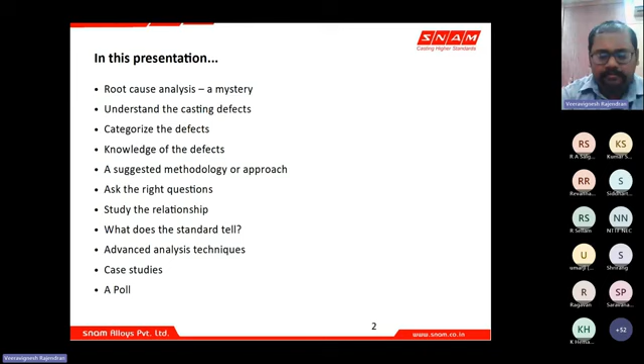Thank you. And we'll be going through some knowledge, like what is the importance of having knowledge of the defects, and a suggested approach or a methodology to handle a defect, and always ask the right questions. So these are the gist of what is about to come today. And root cause analysis, the mystery.

The reason why we call this a mystery is because it is mostly considered to be person perspective. Say, for example, I think that this problem is caused by this root cause. So I start having confirmation bias. The word confirmation bias means I decide that this is the most possible or most favorable thing with my intellectual knowledge, so I try to gather all the information justifying that statement.

So if I do a root cause analysis, what I think as the best cause becomes the major cause. If somebody else does the root cause analysis, what he or she thinks as the major cause becomes the most important cause. But it is actually not that, because the defect is not person sensitive. The casting process involves a lot of science, a lot of mathematics, a lot of chemical reactions, a lot of physical interactions happening during solidification, during pouring, and the entire process. So there is a lot of complexity in the process.

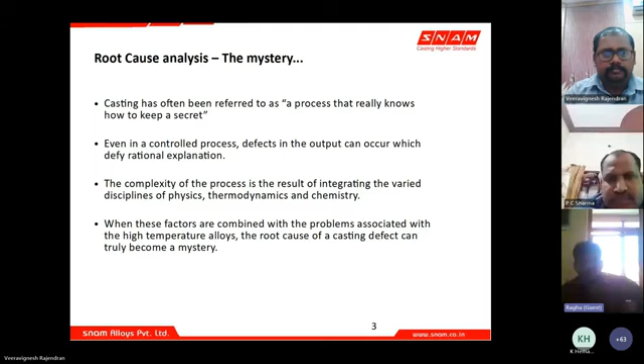That is the reason why arriving at a proper root cause to solve a problem is always difficult for any foundryman. If people have started their career recently as a foundryman, they find it very difficult because of the complexity in the process, and the basic knowledge they have not acquired makes it more difficult for them to understand what the defect is and then take action. You have to understand the defects first. When you want to set something right, you should know what that actually is.

Sir, I'm getting an echo.

Okay, thank you. So casting defects are always very difficult to characterize because, again, it's person sensitive or experiential knowledge sensitive. I say this is sand inclusion. I'm the most experienced person in this organization, I expect everybody else to just listen to me, and everyone should call that sand inclusion only. Even if somebody else has a different thought, I don't encourage them to come up with their difference of opinion, saying, sorry, sir, I differ from you, this might be a different thing.

Or the other way, with the experiential knowledge I've gathered so far, I always categorize whatever I look at as a defect in the same way. For example, anything looking dull, I can call it a short pour or a cold metal, a cold lap. So I try to characterize the way I know.

But the problem is most of the defects are not just due to one cause. It is not just one cause causing one defect. One cause might be causing multiple defects. There can be 2 or 3 defects combined together. One defect could have led to the formation of another defect. So categorizing a defect is always the first challenge. If we don't categorize the defect, we'll not be able to understand it, and if you don't understand the defect, you will not be able to take the next step to solve it.

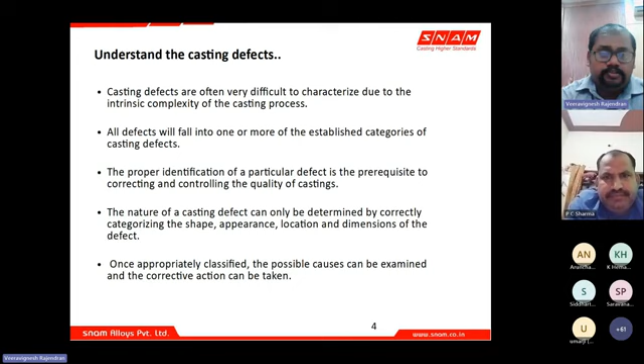Most of the defects generally fall into 1 or more categories. There are some similarities, and some dissimilarities, opposites, what we call. So it is always best to understand the defect. And to understand the defect, first you should know how to categorize the defect.

So we can make a major classification between the defects. I'm not going to talk about sand defect, mold defect, metal defect. No, any defect which is coming up will be categorized as a chronic defect, that means which is long-standing, which keeps coming every time, or a seasonal defect, or it is prevalent for quite an amount of time.

But the other defect is random or uncommon. So we always make a wrong assumption that some of the random defects are chronic defects, and it is expected to happen again, and we start considering a random defect as a chronic defect. Sometimes you should just let the defect go. Maybe the next immediate day the defect might disappear, but that does not mean you should not do a root

cause analysis. But the way you treat a chronic defect and the way you treat a random or an uncommon defect should be different. So standard set procedures are to be arrived at, because a chronic defect is generally time bound, seasonal, particular process related, but random is not that way. Both of these categories of defects should be addressed in a different way, but with set procedures.

So if a defect occurs, measures must be adopted to eliminate its cause and prevent its repetition. That is the baseline with which we should start any action. Say, for example, I should not look at a short-term solution. Today, if I get rid of this defect and complete my production target, say I have to make 1,000 castings, I have to supply 100 tons of castings. Okay, my today's problem is solved, so I'll take a shortcut.

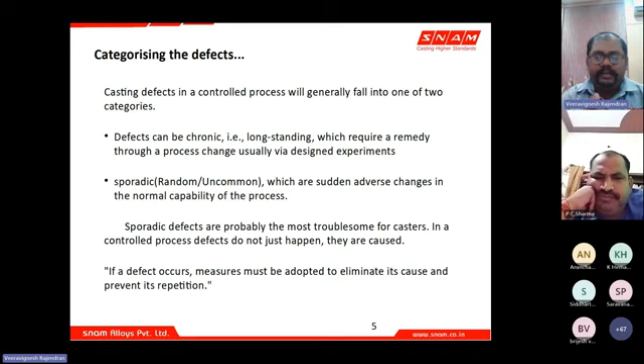This increase in sand temperature might lead to some other defect, like less strength in the mold, leading to erosion in the mold while filling. So you start getting sand inclusions, then other related defects. The strength of the mold comes down, and remote location shrinkage can come up. So one cover up can lead to multiple defects. So we should always target understanding the cause of the defect, eliminate its cause, and prevent its repetition.

So some more things about the random or sudden defects. There are two journeys you should be taking in sporadic defects. Sporadic means uncommon or random defects, because chronic defects are, say, for example, during monsoons, my humidity in the air is going to be high, so my moisture content in the mold is going to be high. So there is a high chance of all gas related defects. So I take special action such that I keep my moisture in the mold less, and I preheat my ladle more, because there is going to be loss in temperature.

So chronic defects, with experience, learned knowledge, and textbook knowledge available, we can to some extent attack or control. Because see, when the monsoon starts, I have an action plan already ready. I'll preheat my ladle twice. I'll reduce my moisture. I keep checking the moisture content in the mold at increased intervals. I keep checking the permeability of the mold. So I've got action plans.

But this uncommon defect, I do not know. It might happen today. The moment I leave my foundry, my second shift or third shift operator might call me telling, sir, suddenly a defect has occurred. So for these random or sudden defects, we have got two journeys. The first is the diagnostic journey.

That means you should understand the symptom, and then that some symptoms should lead to a cause. And the second journey is the cause to remedy. So if we try skipping the first journey and directly go for the cause to remedy, or directly to the remedy, then it is again the biggest mistake we might be doing.

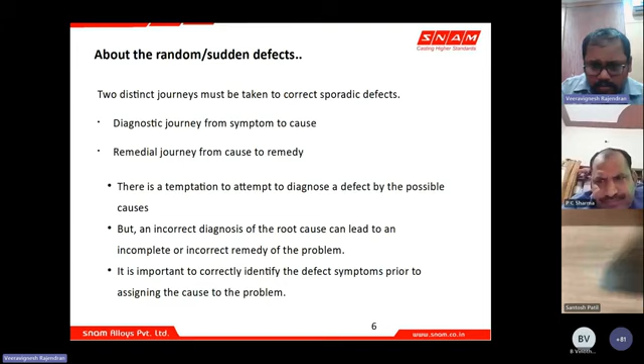It is because your root cause analysis, or the knowledge available to do a root cause analysis or diagnosis, is insufficient. So it is always important to identify the symptoms properly before you assign the cause of the problem. That means you understand the defect first, you feel the defect first, you see how it looks, what the shape is. That is what we're going to see in subsequent slides.

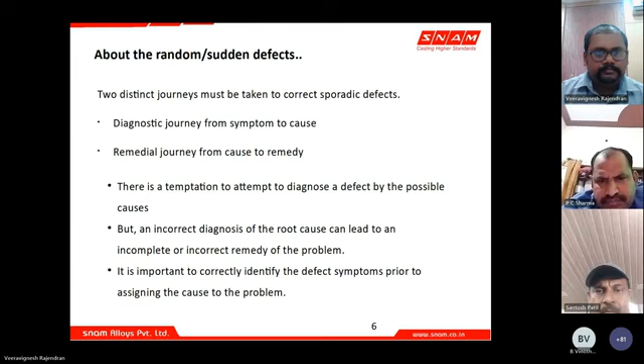So this is the target for every foundry: 0 rejections and 100% okay castings. So how do you achieve this? Identify the rejection, eliminate the rejection, and control the rejection. These are the three things we'll keep talking about again and again in this entire presentation. So, knowledge of the defects.

It is the same scenario, PDCA: plan, do, check, act. To make okay castings, you would have done planning, you will be doing something, making the process, you check the correctness or promptness of the process, and then you make the castings and you sell. In the same way, you should have a plan, do, check, act scenario for defect analysis.

Before even starting on a component or starting a process, you should know the list of problems that can come up, the problems related to the process, the product, the material, which we generally call FMEA. And for every defect which is about to come, the knowledge should already be available in the foundry. It can be a resource, a person, a textbook, or charts.

But knowledge of the defects should be available in the foundry, because without the knowledge, you will not be able to diagnose the symptom. If you don't diagnose the symptom, you always take the wrong step. It is like going to a mediocre doctor and taking an injection to solve all the problems. For example, you might have been starving for 2 or 3 days, you got an ulcer, and that could be leading to some other problem.

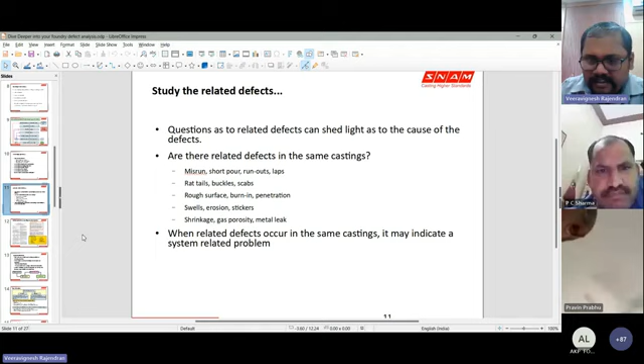So there are some related defects. Say for example, misrun, short pour, runouts, laps. These are related defects. So also rat tails, buckles, scabs. You see either one defect or its related defects. When related defects are available, you can identify that as a clue already available, from which you can easily arrive at a root cause. Say for example, you get a scab. Scab is a penetration defect.

When you have a penetration defect available, sir, I request let me complete the presentation and we'll take the queries further, sir. Thank you.

So when you have any related defects available, say for example, I was talking about a scab. When you have a scab, and if the scab is an erosion type of scab, then you can definitely...

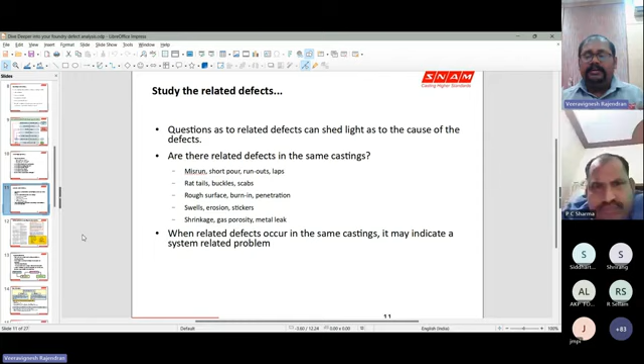When related defects occur in the castings, it may be an indication of a system related issue. So it happened for me to go through an Indian standard which talks about controlling the foundry rejections. So there is a standard available, guidelines for controlling foundry rejection. It mostly talks of grey iron castings, and the standard number is IS 12888:1989. It is available on the internet, and anybody can download it.

And what these guidelines tell is the attainable foundry rejections which are possible. As Kumar sir was talking about the rejection levels in the start of this presentation, what this standard tells is attainable foundry rejections is 5% max. Attainable machine shop rejections is 2% max. Of course, this is pertaining to grey iron castings, but this talks of a process of handling the foundry rejections.

So it is giving you some indication of achievable rejection levels, and it talks about on what basis you should be reporting a rejection, the rejection reporting system, and what is the method card, how a method card should be and what all it should contain. Then it says how a rejection meeting should be conducted and who should conduct it. And it also talks about the feedback system after the rejection meeting, training of the personnel, suggestion scheme, and statistical control.

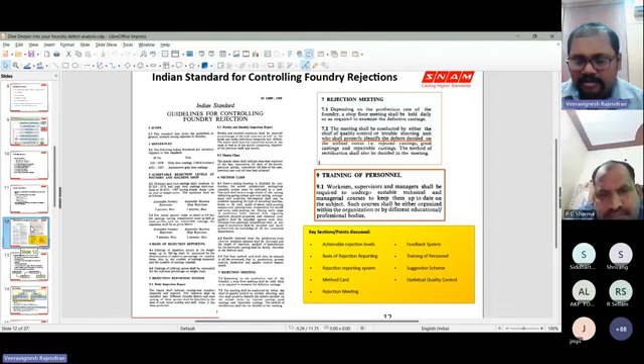So I think it is better. This standard has been arrived at through so many iterations with so many thoughts coming up. So if we just go by the standard, you understand the defect, you identify the defect, you name the defect, do the problem description, only then conduct a rejection meeting, because only then you will start getting the fruit of the meeting.

So identification of the defect, because this is the most crucial step. You should have the right analysis tool, or you should have the right analysis measurement, or that will lead to a control on deviations, and that can lead to less rejections coming up.

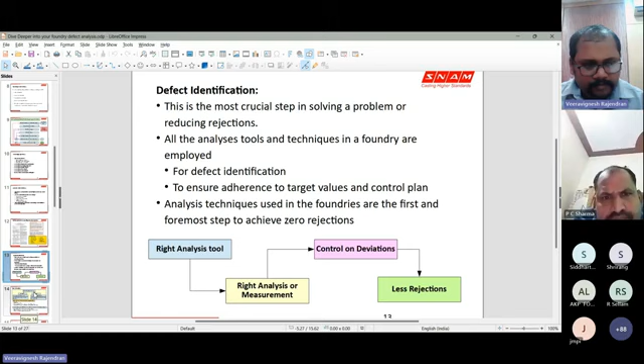So what is available, the different types of analysis generally being conducted in Foundry: one is subjective and the other one is objective. Subjective is generally by experience. See, with my experience, when I feel this casting, or when I touch this part, it looks like a rough surface to me. So this can be a burn-in defect or a burn-on defect. So that is by experience.

Or you use some scientific tools, for example a spectrometer or a microscope, tools to measure. If you have tools available to measure, then it can be a quantified measure, and that can become evidence of the analysis or the identification of the defect.

Factors which can generally influence the subjective analysis: eyesight. The way I see or the way I feel generally tends me to decide what the defect actually is. And positional hierarchy: sometimes, as I was telling previously, if my upper boss tells this is a defect, I somehow feel that I don't want to defy my boss, the person who is above me. So I just go by his words: let me try the way he has already decided. Maybe the junior would have identified the defect in the right way, but it is not coming out.

Environmental conditions: illumination, or the position where you keep yourself and analyze, matters a lot. Skill level, because of training on identification or classification of defects. That means you should have already forecasted that such kinds of defects might come up, and trained your workforce to identify and classify the defect. If that is not there, subjective analysis will always be biased, and it can lead to wrong defect identification.

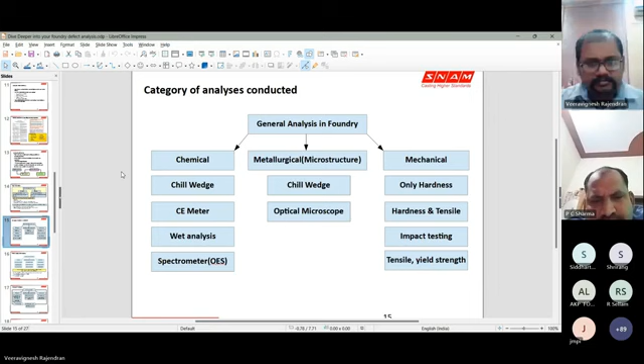Even after having so many techniques, so much quality control, so many levels of checking, why are rejection rates still high? What it tells is maybe the existing analysis tools are not adequate or competent enough to identify or diagnose the defect coming up. The identification of the defect or issue is not done the right way, or the deviation is not measured the right way, or it is not being used in the proper way to control the deviation.

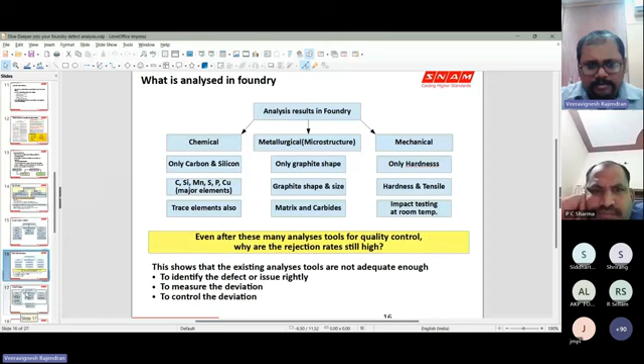So what you can do to get over this is, there are advanced techniques available. Say you can do EDAX, or with respect to chemical composition, I'm talking of, you can do a cross check sometime using a LECO carbon sulfur analyzer. You can use a cross check of this with your existing spectrometer, with your existing CE meter, with your existing methodology of arriving from the chill wedge to a carbon equivalent. You can have a cross check of all these things.

You can have a cross check of your OES analysis. You can have a cross check of your electron microscope. The reason why I'm emphasizing the analysis technique is because these analyses will lead to a number or an attribute, yes, no, or some numbers. Using those numbers, you identify the defect or you stratify the defect, right? And if the defect stratification is done right, and you have got a measure to measure the defect, then you will be led to proper corrective and preventive actions.

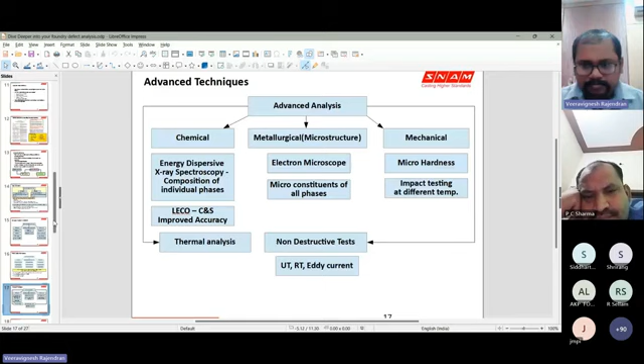So these are the different types of advanced techniques available generally with respect to castings, which can help you in addition to your existing analysis. So I've got two case studies with me right now. I'll share the experiences which I had faced, and how we have overcome them. And I'll talk about the wrong identification of the defect.

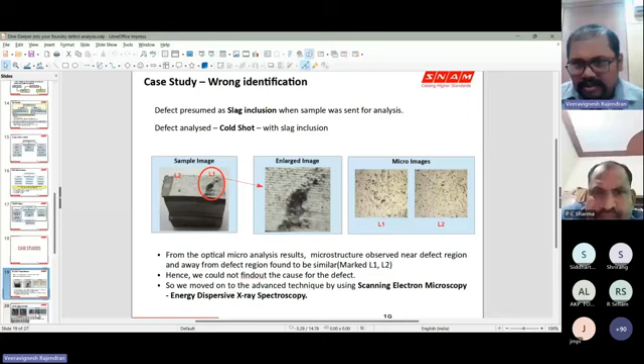So making the observations, the defect cavity has got a spherical nature inside, and it is a cavity. So it is a cavity defect caused by what? We arrived at: the morphology is spherical, the composition is similar, and the defect is cold shot. We arrived at this with the available knowledge and information, because of the morphology of what is deep inside the defect, and the source of the defect could be either a change in turbulence or the initial velocity could have been different. So these are defect tools which are generally not available in the existing microscope, or which cannot be done by a conventional method.

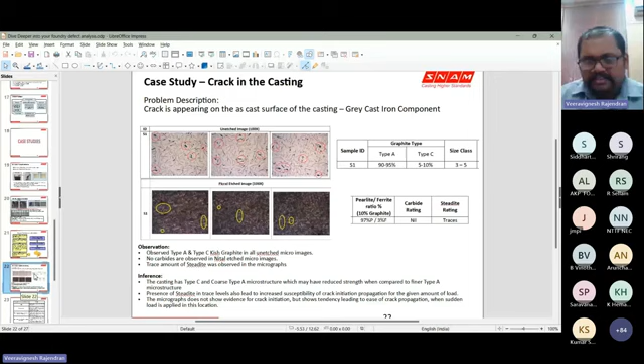And I just want to explain about the perception of the advanced techniques available. What people generally think is that advanced technique means the analysis technique, the resources available, sending for a training, investing in a training. All these things, let us call them advanced techniques. People always think that it is costly, but it is less costly when you compare it with the cost of rejection which is coming up.

Cost of rejection is not just cost of rejection. It is the credibility of your name at the customer's place. Maybe next time the customer is not going to believe you and he's not going to give you a repeat order. That is more costly than the cost of a training or the cost of an analysis. People think that it is time consuming. No, it is not time consuming. It is systematic. There is a minimum time which is to be consumed by the process of defect analysis to solve or rectify the problem.

If you think a solution can be as quick as a snap of a finger, it is wrong, or it is not the right solution, or you're trying to cover up something. The time consumed by various trial and error methods is actually a bigger time loss. Say, for example, I make 3.1 carbon, 3.2 carbon, 3.3 carbon, 3.4 carbon. That is a waste of time. I cannot do so many trials at my foundry. So I invest in the advanced analysis techniques available, by training or by knowledge gathering, such that I take the minimum number of trials and solve the problem at the earliest.

And they are not available at all places and cannot be afforded in a foundry. Yes, it might look expensive to the foundry. Sometimes people think that it is not affordable, but this is just a one-time investment. If this is not being considered at the design stage or at the starting stage of a process or a casting, then this is the biggest mistake any planner is making.

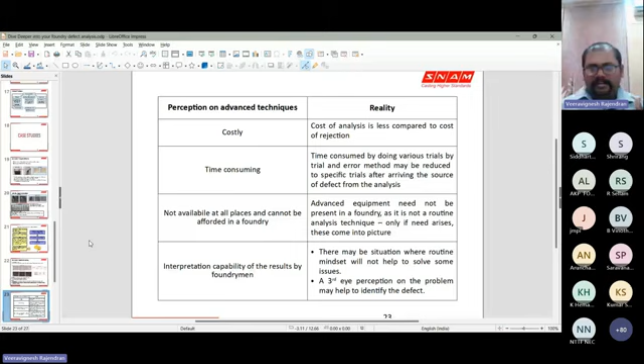So what I've done is I have 4 or 5 questions with which I thought, let me understand the existing scenario of a foundry. I've made a poll. I'll copy the link of the poll in the chat box, and I request all the participants to take it if they wish, and there are no confidential details in these questions.

So I request everybody to wholeheartedly and true to your knowledge respond to this question, such that we'll understand where we are. So the first question is, do you have a defect or rejections handling procedure and guidelines in your organization before the start of production? That means when you take up the casting. And the second question is, how many times during rejections handling have you adopted a proper and systematic approach?

Say, for example, out of 20 times, I would have had 10 times a systematic approach. I'm not going to tell that you're not systematic at all. Out of 20 problems, 10 problems I would have spent in a systematic way. 10 problems I would have taken a shortcut to solve because I didn't have time. So how many such instances are there? And how many times have you achieved first time right in solving a defect? So you tried to solve a defect and you solved it permanently at the first trial itself.

How many times have you solved the defect and you have created another one? Say today, to reduce the weight of the casting, I've done some exercise, or to increase the flow rate or filling, I've increased the in-gate thickness or done some kind of gating thickness corrections. But because of this, I've created an inclusion. So how many such kind of occasions have you had?

And how many times have you documented the defect analysis approach followed? Say you would have already followed a procedure or an approach to solve one defect. Do you have the documentation available with you right now for future reference?

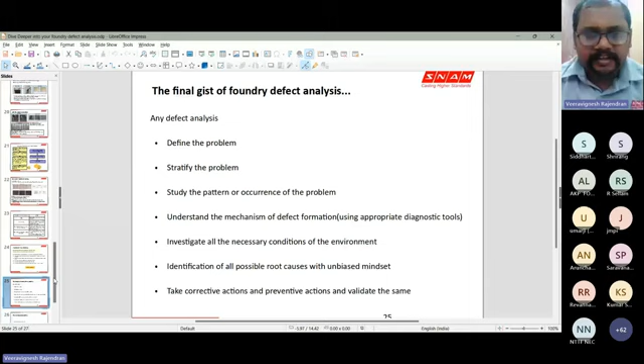When you have a common sense approach, you always think, okay, why did the defect come suddenly today? Why has the defect come only in this cavity? How many times have we faced this defect in this entire month? So this is the common sense approach, because you need not be a metallurgist, a mechanical engineer, or a chemical engineer to start the defect analysis. You should have common sense.

And an unbiased and systematic technical approach, yes, it should be there. This unbiased and systematic technical approach should be complemented by the common sense approach. Gaining and implementing the technical know-hows, because your knowledge might become obsolete, and science is generally being redefined when new technology or new principles come up.

People were talking of the atom never being broken down, and today we are talking of energy generated by nuclear fission. If we were to just believe that the atom can never be broken down, that anything inside the atom can never be seen, today we would not be talking of nuclear submarines or nuclear warships. So today's science can be redefined by tomorrow's science. So you keep updating, gaining knowledge of technical know-hows, and you start implementing it.

Use of technology wherever possible. It is not to eliminate people, it is to enhance and support people. This technology will aid you in taking the right decisions, the quicker decisions, the prompt decisions.

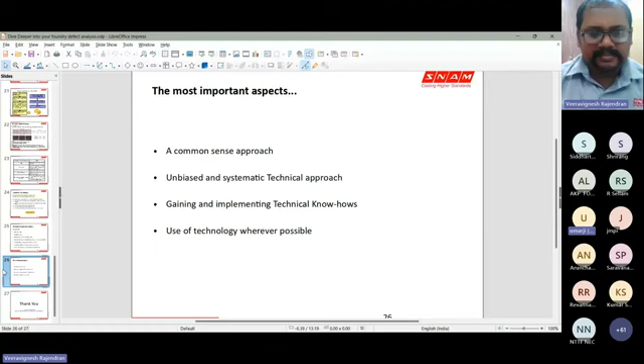Shall we take some questions? I see some questions in the chat. Yes, please. So the first question was how to control surface finishing, from Ashwin Mohit. Yes, sir. How to control surface finishing, sir?

Again, if we go by the presentation I gave today, the description of the defect is not so clear. Control surface finishing in what, sir? Surface finish of the core or the mold, what type of casting, what type of sand, what type of molding practice you follow? Let us list down all these things, because if the answer was readily available with somebody, the surface finish problem could have been solved by all the foundries overnight.

Frankly speaking, is that surface finish problem persistent for you? Has it been occurring in all types of castings? You start listing down the ifs and buts, and then the pattern of it; you might already have a clue available in your way of analysis. So it is not right for me to say one thing and do something else.

The next question is, what actions are to be taken for avoiding exploded graphite in SG iron? Sir, I'll tell you how exploded graphite forms. I'll just explain the mechanism. You start having a nucleus, on that nucleus you start graphite precipitation, and that graphite precipitation grows in the shape of a nodule, because of the magnesium and the crystal structure available.